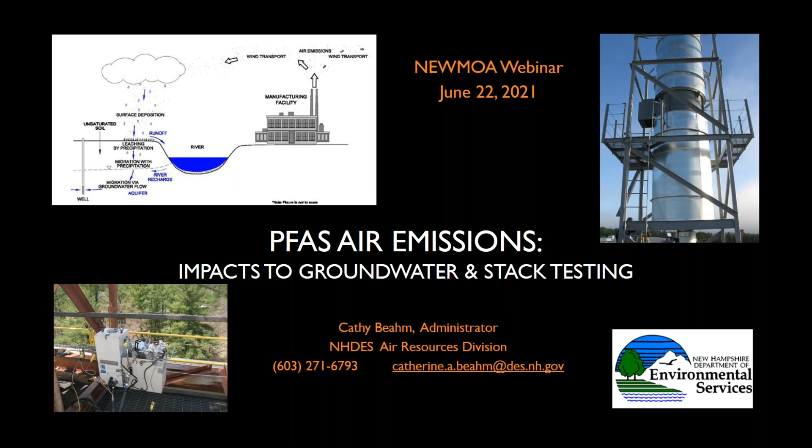So the primary pathway that we've been dealing with this particular facility is through their air emissions, but we do have PFAS sites throughout the state that are not air sites, landfills and other types, Air Force bases and stuff like that. But today I'm going to be talking about a manufacturing facility and kind of the history that we've gone through with that. Let's see if I can get this to advance. There we go.

But to start us off, I just wanted to give you a brief overview of where PFAS might be found in air emissions, just to get everyone up to speed. You may have heard of some of the issues surrounding West Virginia and North Carolina and even out in Minnesota, where the manufacturing facilities that make these raw materials had releases to the atmosphere as well as localized emissions or releases. Those particular facilities have much larger levels of emissions than perhaps the industrial facility that I'm dealing with, but they manufacture the raw materials that come to our facilities.

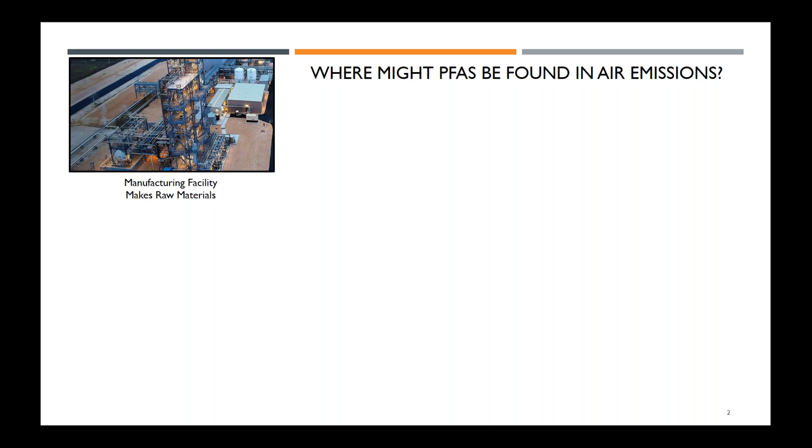And so a lot of the studies around those locations have been used to get a better understanding at these other sites. So our particular industrial facility is a coating facility. They apply a PTFE coating to fabric to make various products, but that is not an exclusive industry that would have these issues. There's also manufacturers of medical tubing or coating of wires and other types of operations where they may use, in this case, a liquid dispersion that applies these compounds or forms those products. And the heating of those has caused emissions from the stacks.

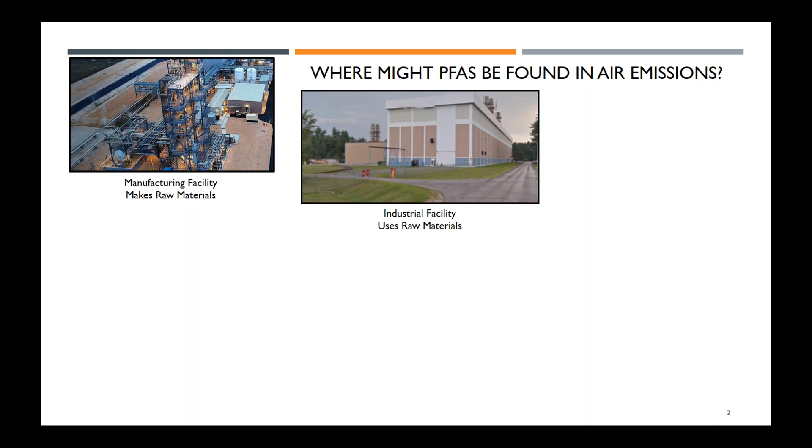And then in addition to using the product to make a final commercial product, there's also the use of PFAS compounds as mist suppressants. In this case, I'm showing an example of chrome platers who are not making a product that has PFAS in it, but who historically used a PFOS-containing mist suppressant to keep the hexavalent chromium from exposing the workers in the facility to that compound. But unfortunately, using that has resulted in either being emitted, if they evaporated some of the waste material, or if they had other types of exhausts related to the chrome plater, a release of that PFOS at that facility.

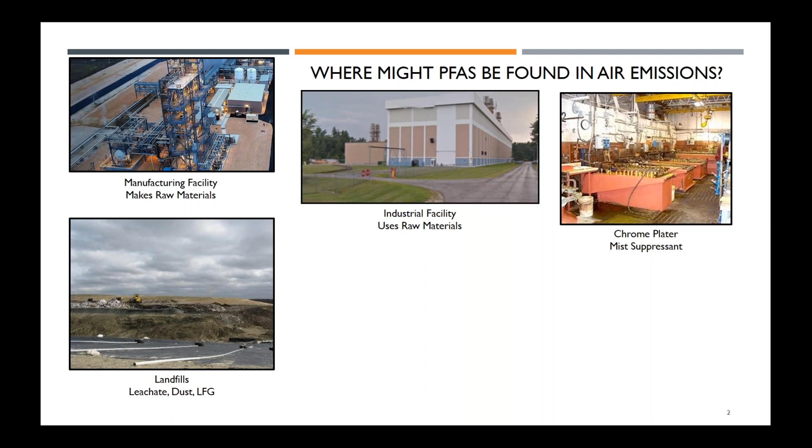And then, of course, talking about PFAS, you can't not talk about landfills, wastewater treatment plants, and airports and Department of Defense sites, primarily the leachate that comes from the landfills or the biosolids that come from the wastewater treatment plant. But in terms of air emissions, I wanted to bring to everyone's attention that there have been some studies done upwind and downwind of landfills and treatment plants, looking at ambient levels of PFAS, mostly in the picogram level, much lower than the stack test emissions of the facilities, but still detectable around these locations as dust or as vapors.

There are also studies being conducted through a grant from EPA to look at whether PFAS compounds exist in landfill gas, most likely the shorter chain or more volatile compounds, the telomer alcohols, that sort of thing. And then with the biosolids from the wastewater treatment plants, there's been a lot of discussion on land application, but there's also the possibility that those biosolids could be returned to a landfill for disposal or incinerated in a sewage sludge incinerator. And there's been some curiosity and some work done to look at sewage sludge incinerators as possible emission sources as well.

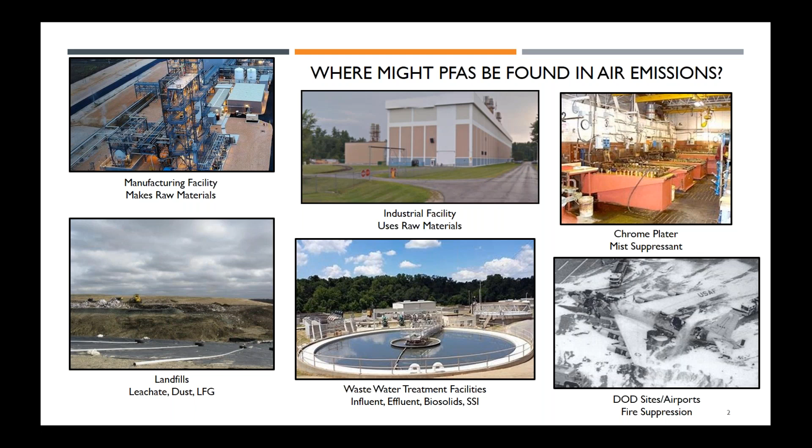And then finally, using AFFF at airports and DoD sites and the possibility of the foam blowing away and contaminating the area around that as well. So just some areas where PFAS might be found as a result of air emissions, not necessarily direct release through liquid or solids. So to put everyone on the same playing field with the type of facility I've been primarily working with, I just wanted to go over a typical fabric coater that uses these compounds.

In our particular case, as I said, they would purchase raw materials, and those raw materials have the compounds that they want to apply to the fabric, whether it be PTFE or other polymers. But in order to keep those in suspension in the coatings, they needed some sort of a surfactant or a dispersion material that would keep those compounds in solution. And so they would purchase, in the past, raw materials that would contain percent levels of PFOA or the ammonia salt of PFOA.

They would mix those compounds to make the coatings that they would then put into a dip pan, and the fabric would be rolled through the dip pan and up vertically into these 3-section towers. The towers would dry the fabric to first remove the water, bringing it up to over 100 degrees C, then up through the second stage where they would volatilize off the surfactant used in the coating. And then finally, in our case, sintering the resin onto the fabric to make the product they were selling to their customers. Of course, all 3 of those vents would then combine into a single vent to the atmosphere, and that's where a lot of our stack testing has occurred.

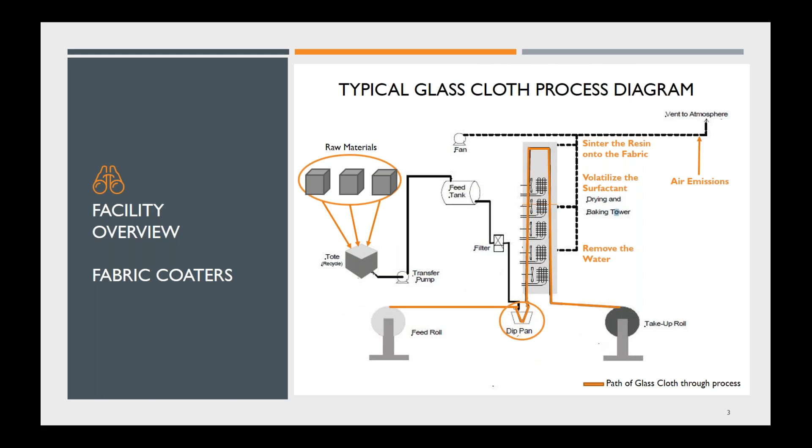And a lot of the history of this facility I now know as a result of doing a lot of research. At the time, they contacted us to let us know they were testing the facility, that the emissions from that facility of this ammonium salt of PFOA were at a level that would cause a violation of our State Air Toxics Control Act, which was in place as of the 1980s. So we actually had a standard for air inhalation of the ammonium perfluorooctanoic material, the ammonium salt of PFOA, on the books. And it was as a result of that standard and that stack test that the facility entered into a consent decree to reformulate.

Looking back over time, it's clear that that stack test was done as part of a dispersion study that the manufacturers were looking to conduct for research for EPA for their own reformulation issues. And the reformulation was also at the same time being done by the manufacturers. So all of this took place in and around 2004 to 2006. And by the end of 2007, they had reduced the APFO concentration in their raw materials by over 96%. So at that point, it no longer became an inhalation issue, and they continued to operate at these much lower APFO levels.

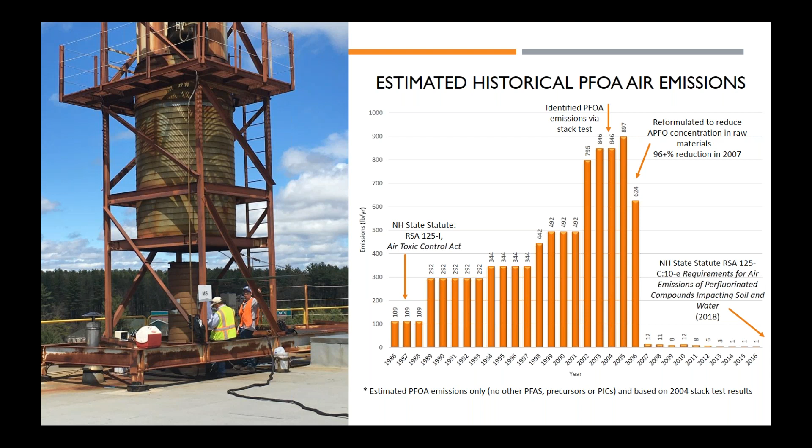So I wanted to point out to you in this chart, this is specifically looking at PFOA stack test emissions in 2004 and applying it based on the number of towers. This isn't looking at any other PFAS compounds that we would now be looking at in 2021, or precursors or any products of incomplete combustion. This was simply trying to identify where PFOA was going at that time.

And so we have been working as a department with the facility to get public water systems to these homeowners that had high levels and dealing with the contamination issue. But this modeling was really used to help decide where that area was. So in the meantime, they had complied with the ambient air standard. They'd reformulated, and they were dealing with the water contamination issue, but we did not have on the books any kind of standard that addressed air emissions that cause or contribute to a groundwater problem. There were no regulations at that time.

So between 2016 and 2018, the Air Division continued to work with the company to test the raw materials coming in, the coatings that were being applied, and dust that was collected outside the windowsills at a condominium across the street. Their consultant did some wipe samples on the roof. There was a significant amount of char buildup in the stacks and residue that was either a sticky material or a dry, crusty material that was flaking off onto the roof. That was all sampled.

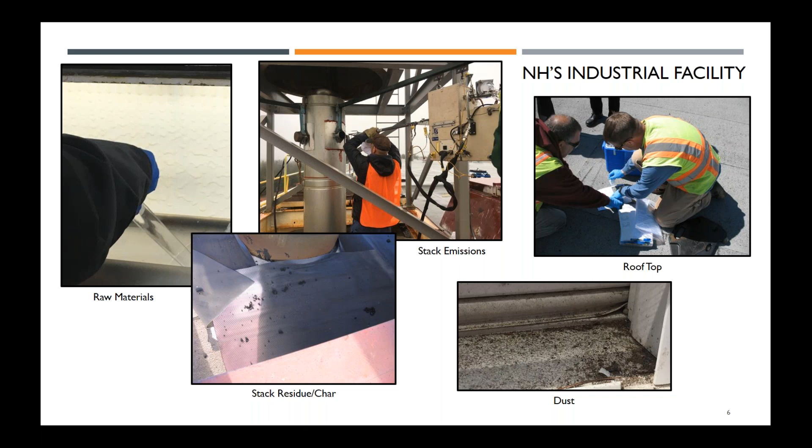And then there were 4 stack tests, 3 in 2016 and 1 in 2018, to look at what kind of PFAS emissions were coming from the facility. So all of that information, along with the historical emissions and modeling, was used to evaluate the facility, its impacts, and its contribution to the issues. So I just wanted to go over some of the observations we made during the 2016 and 2018 stack tests.

In 2016, the department contracted with a stack testing company to go out and collect information on the emissions from the facility. There were several PFAS compounds that were emitted and were measured at low levels. And keep in mind, there are no EPA certified standard methods for PFAS testing, especially in 2016.

The testing that was done in the 2004 timeframe was a method developed by the stack testing company that they had recruited. And that was the same method that was used in 2016. Detection levels were getting better at that point to be able to detect these compounds, and these were 3 of the emissions that were detected in 2016.

The company then worked with their own stack testing company to come in and confirm what we had found, and they did some various tests. So they ran some stack tests when they were not putting coating on the fabric, and they still found emissions. They cleaned out the tower that we were stack testing. They cleaned out the ovens. They replaced the ductwork, the stack, and the dilution fan, and they found that they reduced PFOA emissions by 67% just by doing basic housekeeping, but still emissions coming from the facility in 2016.

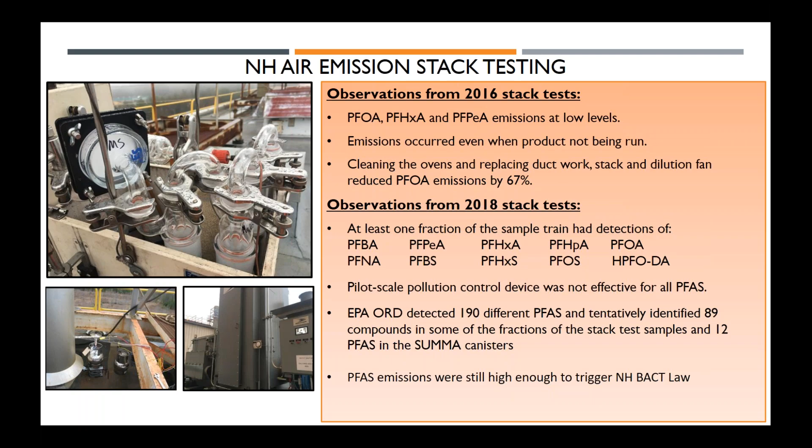But the PFOA emission levels were still high enough at that point to trigger what I deem the New Hampshire BACT law, which was a law that came into effect in 2018. I won't read it to you, but it basically says that if you've contributed and you're continuing to contribute to an ambient groundwater or surface water quality standard violation, then you have to do an evaluation of your emissions, determine what would be best available control technology, and then apply for a permit to operate that. In addition, once that control is put on, the emissions can't continue to cause or contribute to a violation.

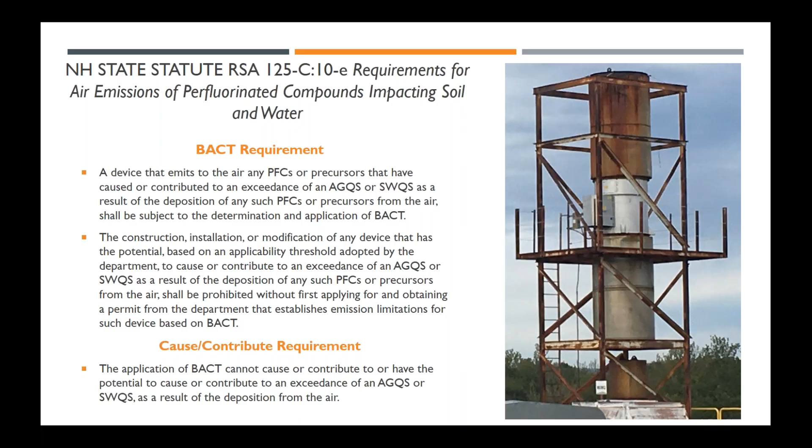So in 2019, they applied for the installation of a 3-chamber regenerative thermal oxidizer. And in February of 2020, the department issued a permit with operating conditions for how that RTO should operate, and determined that that was the best available control technology. Now, as many of you are probably familiar with, incineration of PFAS is still an evolving science, and more information is always coming in and necessary to make good determinations.

The operating parameters for which this RTO has been required to be designed based on the permit were based on an August 2019 EPA technical brief, in which they stated that to get 99.99% destruction of fluorinated compounds, you'd need to be above 1,000 degrees C for a second of residence time. So that's what's required of this particular RTO. And the intent is, although we have groundwater standards for 4 PFAS compounds, an RTO should destroy all of the PFAS compounds, or at least degrade them. So the concern, of course, is if there are products of incomplete combustion, and then of course hydrogen fluoride would be formed through the combustion of PFAS compounds.

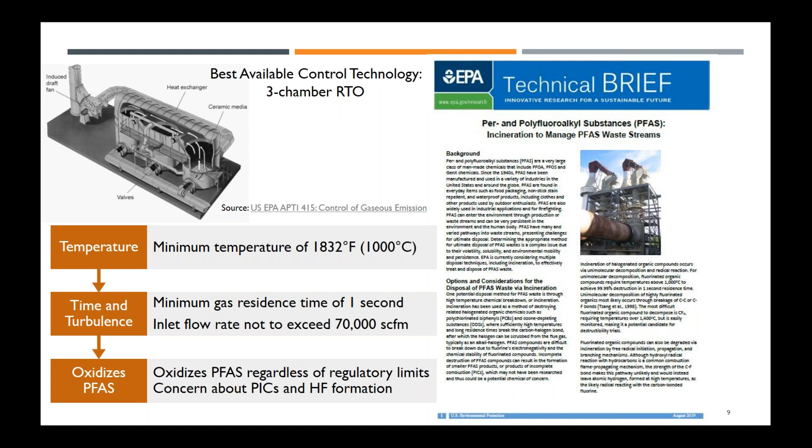So where does New Hampshire go from here? The thermal oxidizer was supposed to be installed in February. The company did not meet that deadline. They are under a consent decree to have it in by the end of July of this year.

We are currently evaluating some information that they were required to gather on PFAS content in their raw materials, and reviewing a material balance and making sure that the hydrogen fluoride emissions don't exceed the standards in our state air toxics rule. We're also preparing for the RTO stack test. The company, as well as the department, are conducting a rainwater study similar to what other states have been doing, to look at what level of PFAS is just basically coming down at background levels.

And then we're continuing to work with EPA, maybe not so much on methods development, but on validation. They have come out with OTM 45, which I'm sure Wes will cover, that will be one of the stack test methods that we will use during the test. But then there's another destruction efficiency test method. I don't think it has an official name, but they would propose using a surrogate to try to determine the destruction efficiency of the RTO.

And then we're further investigating other stack test information that we have, and looking at our own facilities and reviewing national information about stack test and emissions. And finally, we're going to be reviewing the TRI data next year and determining if there's any other sites that we should be concerned about. With that, I can open up to questions.

All right. So, what are we talking about here for PFAS and air emissions testing? As Kathy said, the focus has been on drinking water, groundwater, soil, and not that much focus on air to date, but that is changing. We're starting to see this come up in numerous states and numerous facilities. There's no validated ambient air monitoring methods for PFAS, and there's very few regulatory standards for PFAS in air. So we're on the very genesis of this.

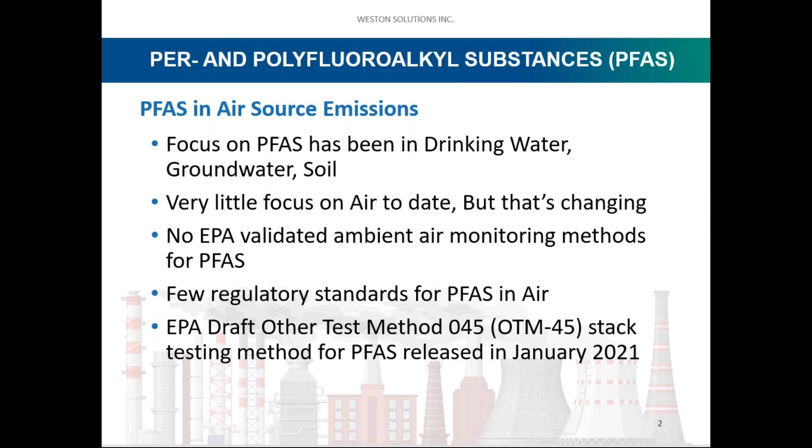My slide used to say that there were no validated stack testing methods for PFAS, but in January of this year, EPA came out with their draft, what they're calling other test method, OTM 45, for measuring PFAS in stack emissions. So that's kind of where we're at. That's the backdrop of it. And, you know, this is my chance to tell our story here.

So why air? Sometime in 2016 or 2017, they found PFAS in the drinking water in Wilmington, North Carolina. And it didn't take them too long to look around and say, okay, well, there's a facility about 40 miles upstream that makes these materials, and started doing some investigation. That was at the Chemours facility in Fayetteville, North Carolina.

They started looking at it. They started doing groundwater testing around that facility, and they found PFAS in the groundwater, in the wells, water that they were sampling. And they noticed, okay, we're seeing contamination in wells that are upstream of the plant. So how is that happening? And this is all along the Cape Fear River in North Carolina. They immediately went to air emissions, and they started doing some modeling, and they found that where they're seeing the concentrations fit the air dispersion modeling.

So, court orders and investigations and all that happened, and Chemours was put in the position of cleaning up a lot of things at the plant, but one of the things that they had to do was start cleaning up the air emissions. And they called on us to do some stack testing, and they called on Test America to work with us on the analytical side of it.

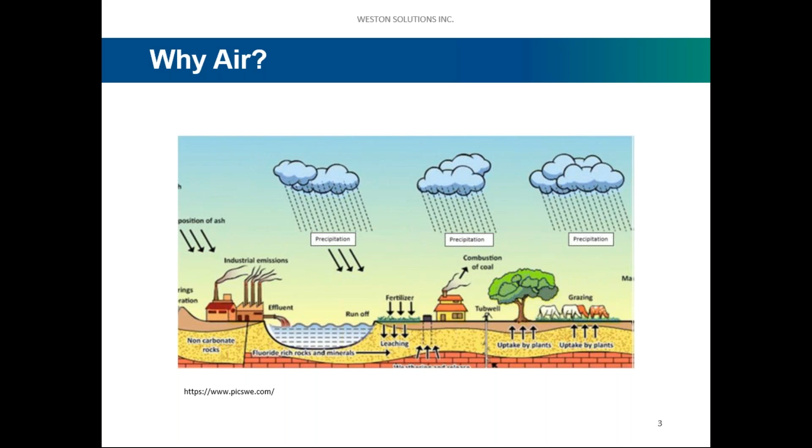Some of the things we had to look at in getting to this were, okay, what are we even looking for? Because there's no background for air. Everything that's happened up to then had been mainly in drinking water. And so we have these methods out there, 537, 533, and EPA method 8327. I'm not that familiar with it, but I included it because it's noted in the actual EPA draft OTM 45 method. So you see there, 18 compounds in 537, 25 compounds in 533, 24 in 8327.

And if you look at OTM 45, there's about 50 compounds listed as the analytes that are targeted. I put approximately on there because that list, I think, is evolving, and it can evolve if we have the right standards to set up for the analysis. But with over 6,000 PFAS compounds, I've seen that number anywhere from 4,000 to 9,000, we're only targeting a small number of these compounds, and most of these fit in the semi-volatile range, and that was why we decided to go with EPA SW-846 method 0010, because that's the range where these compounds fell.

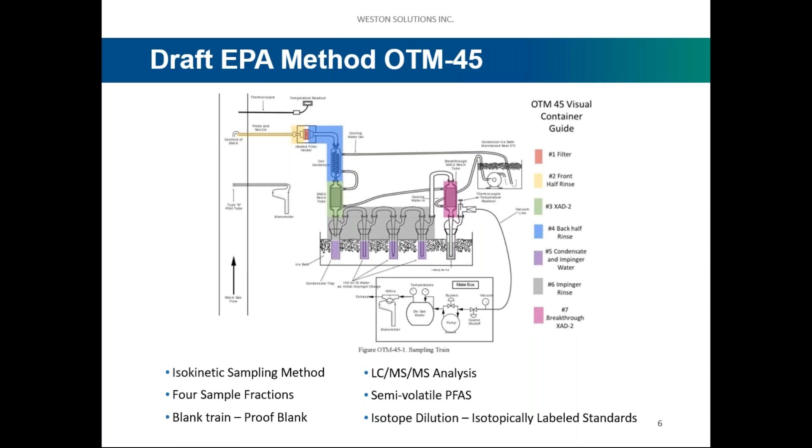So that's OTM 45. Semi-volatile PFAS, semi-volatile meaning that it volatilizes above 100 degrees C. In some of the testing that we did for Chemours, we were looking at very high concentrations on, say, some inlets to scrubbers or carbon beds or to the oxidizer. And so we couldn't use this methodology because we'd quickly saturate this XAD and some of the other pieces of this. And some of the compounds we were looking at there were highly volatile. They fall in the volatile range.

So let me just back up here. So this is the train itself. And this is the glassware, and you can see our probe is entering the stack here. There's a number of thermocouples here where we're controlling the temperature of the probe, the temperature of the filter box, and the temperature in the XAD resin water jacket.

But if you look right here, this coil is horizontal. OTM 45 has the coil vertical. So we had to change this up. This is an older picture, but I wanted to show you what we were doing at Chemours for most of the testing. We had this in the horizontal position. We moved to the vertical with OTM 45.

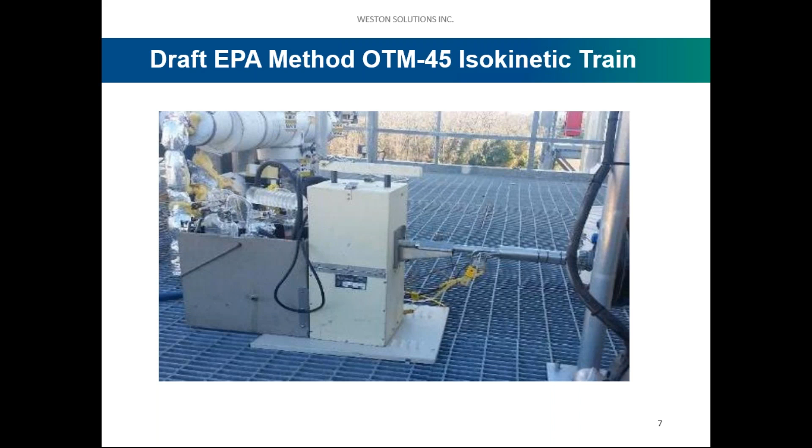In this situation, the glassware is separated from the filter, and we've got a line running over here where it's coming into our glassware. In OTM 45, this line is required to be heated. We weren't heating it when we did this testing.

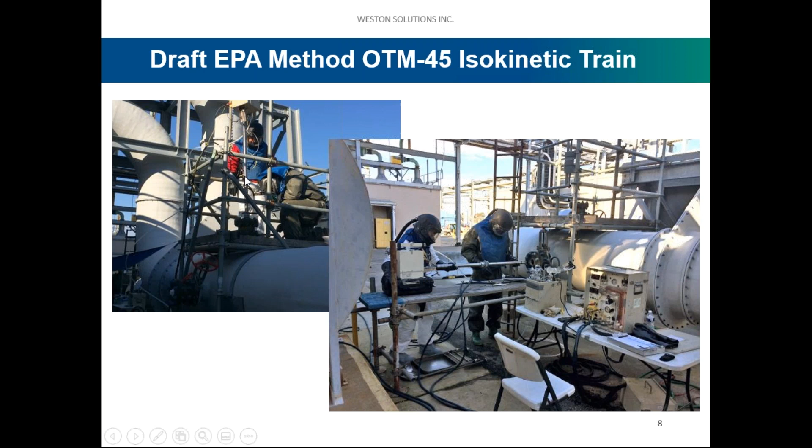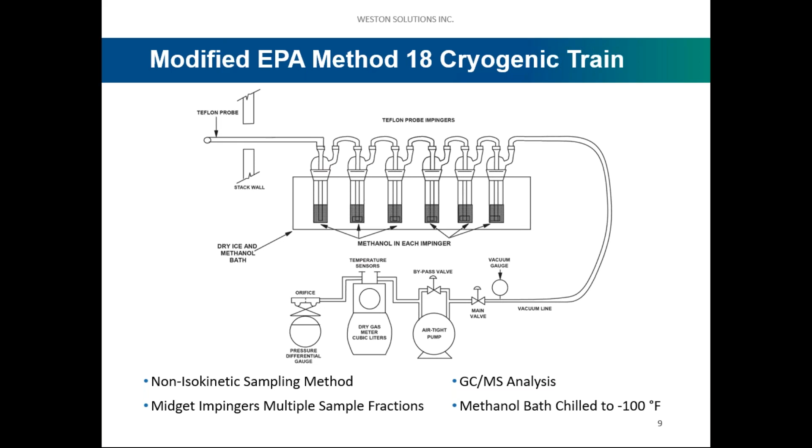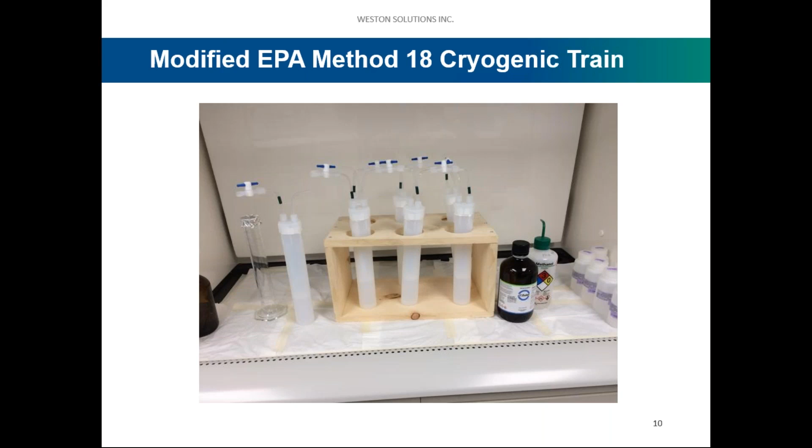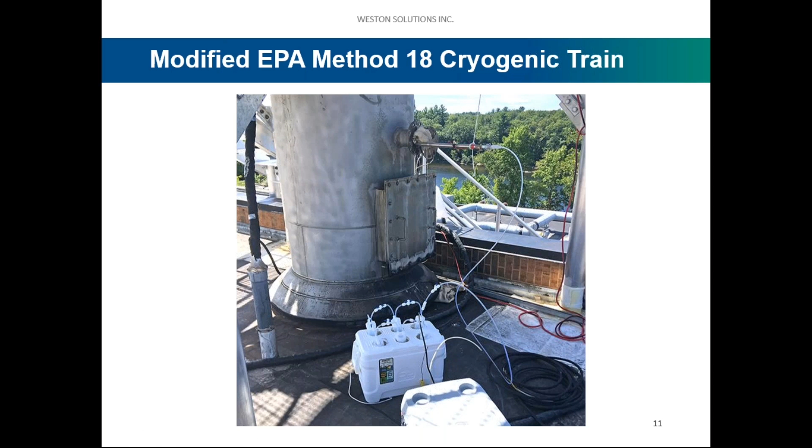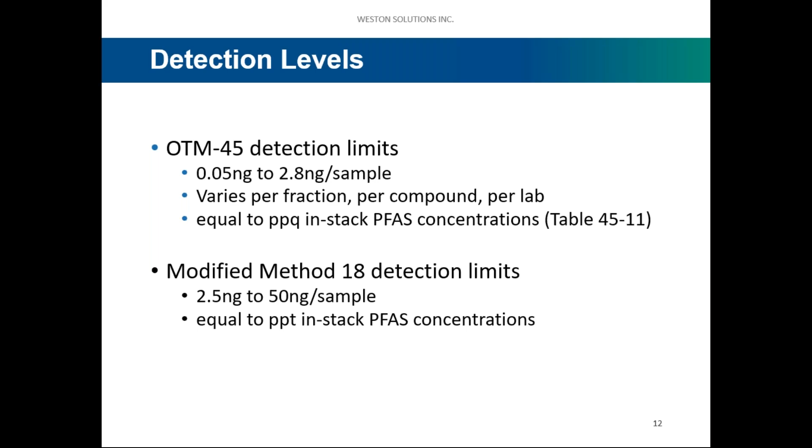But Kathy mentioned that EPA has a canister sampling method. I know they've used it at the facility she was discussing, and I think they've used it probably at a facility up in Alaska, Moose Creek, where they were testing the incineration of AFFF.

I don't know much about this method, only that you can measure the very highly volatile PFAS and non-polar PFAS with this. The data I saw, they were looking at 4 liters of sample gas in a canister, so a very small sample, and looking for compounds that are not going to be collected on the OTM-45, or possibly not even in that cryogenic train if their boiling points are below minus 100 degrees F.

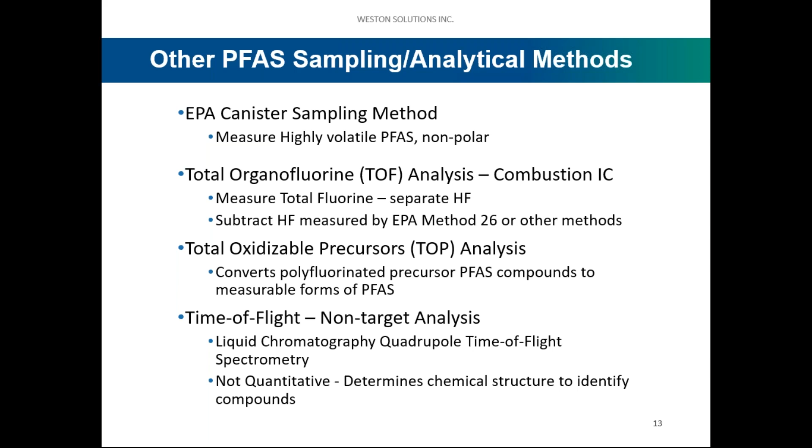So, these are things on the horizon, and there's been a good bit of talk, at least I'm told, about using that cryogenic train to collect samples for this TOF analysis or the TOP analysis. And I don't know what sampling technique would be used for the non-target, but I'm sure that cryogenic would probably fit in there as well. So I just want to let you guys know that there's more to come. OTM-45 is just the first step in collecting samples for PFAS analysis. There's much more to come on how we're going to do this in the future.

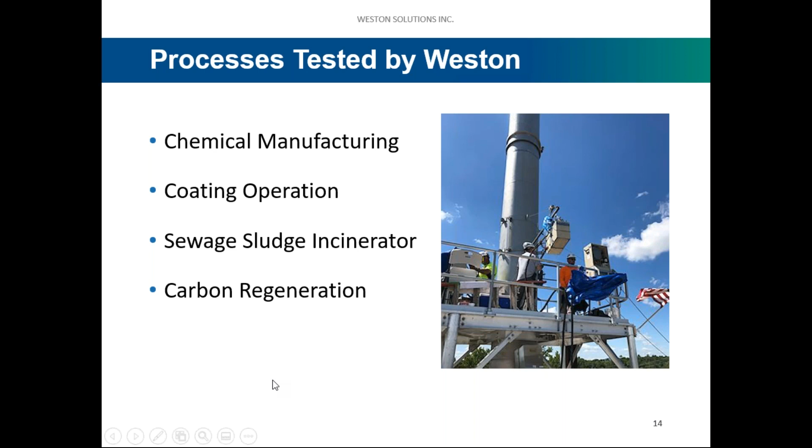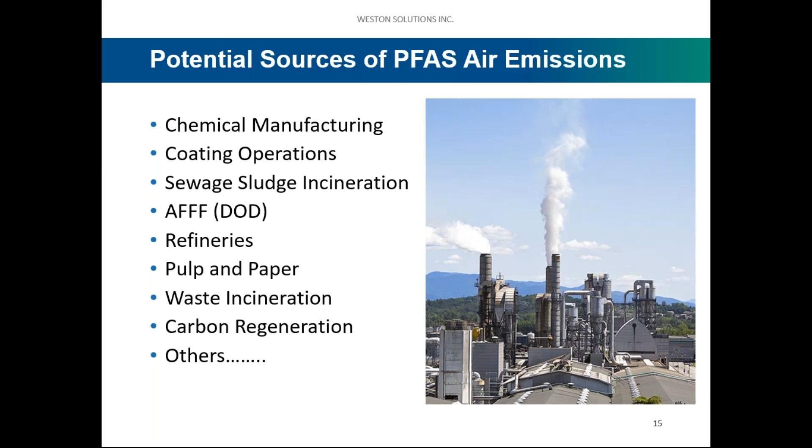The only thing I note on this picture is for the air dispersion modelers out there. We got one plume that's going straight up in the air, and then another plume that's going crosswind. And this is something I take note of when I'm out there, because I see this quite often where plumes are going in different directions on a site. And so I just thought that was interesting to throw into this.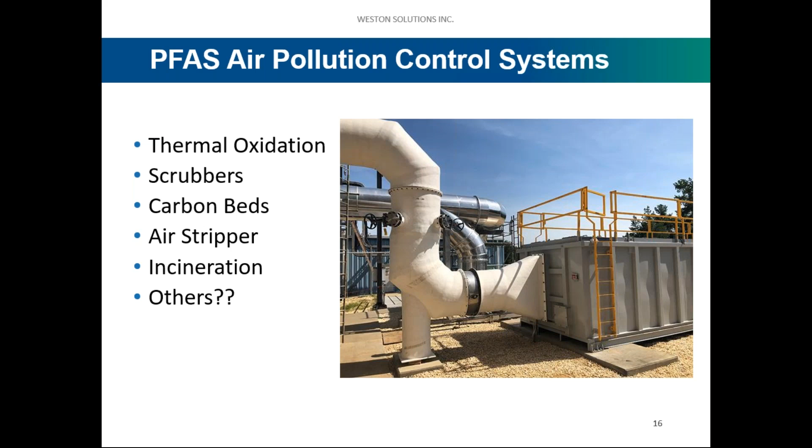We did one pilot air stripper at another facility, and we've done some incineration as well. And I'm sure there's other pollution control systems. I think the oxidation is the one that seems to be getting the most attention, but I'm sure there are other mechanisms for this.

So what's in the future here? In 2019, EPA issued their PFAS action plan, and that covered a wide range of things. I'm sure most of you are familiar with this. And some of it was related to stack testing and goals for developing methods, not only stack testing, but ambient and others.

One thing to note, Michael Regan is the new EPA Administrator, and he is from North Carolina. And he's very aware of the situation in North Carolina. And just a couple months ago, he put forward this EPA Council on PFAS, and in his words it is one of his top priorities. So I think there's lots more to come on PFAS, especially on the air side, just based on his experience from North Carolina.

We're going to get actual validation probably of some methods. OTM 45 is not, I don't think, officially validated, but it's another test method which can be used. And there's going to be promulgation of some of these other methodologies and analytics that I was discussing earlier. Legal action by state regulatory agencies. Kathy touched on some of this.

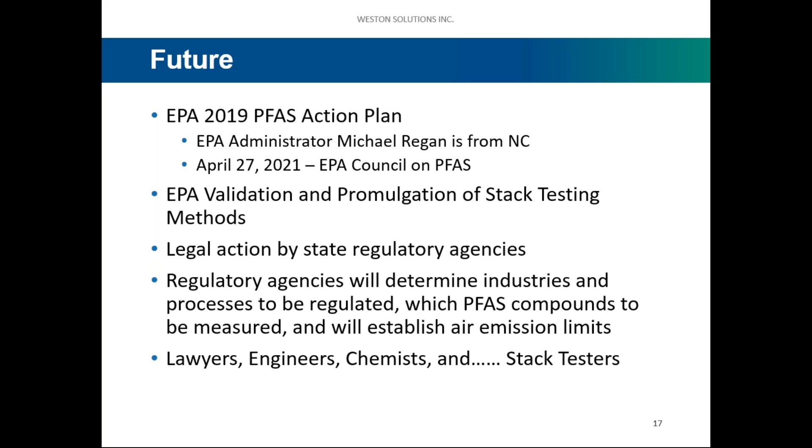That's it. I wanted to give credit to Billy Anderson at Eurofins Test America. He really has been kind of the crux of developing the methodologies that we've been using, and we've been putting them into action and implementing those. At Test America, Billy and Courtney Atkins have been highly involved in setting this, and they have the ear of EPA ORD. So they have lots of communication with EPA ORD on these method developments.